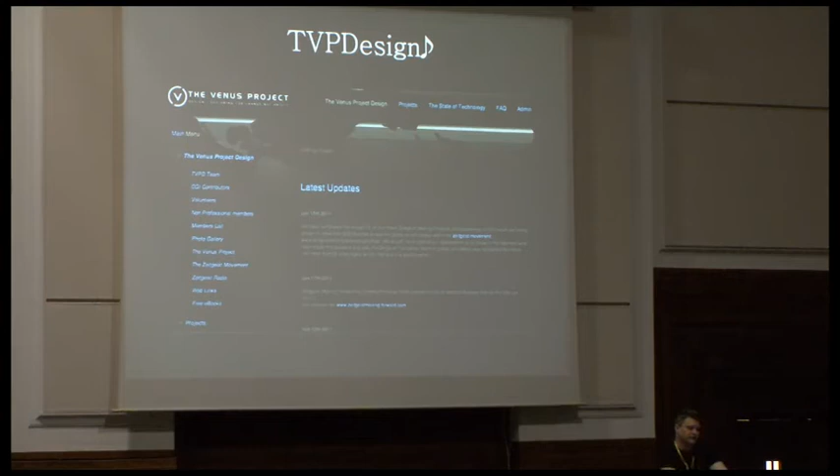So we later developed the website to include a global scientific and technical database. We've now got around 1,500 people on that database, from architects, engineers, neuroscientists, all the different scientific fields. We've got technicians from all different fields signed up there, so that if at some point in the future a country does decide to take on the Venus Project ideals and build the first city, we can pull on that database and bring people from that local area or country into the design of those first cities.

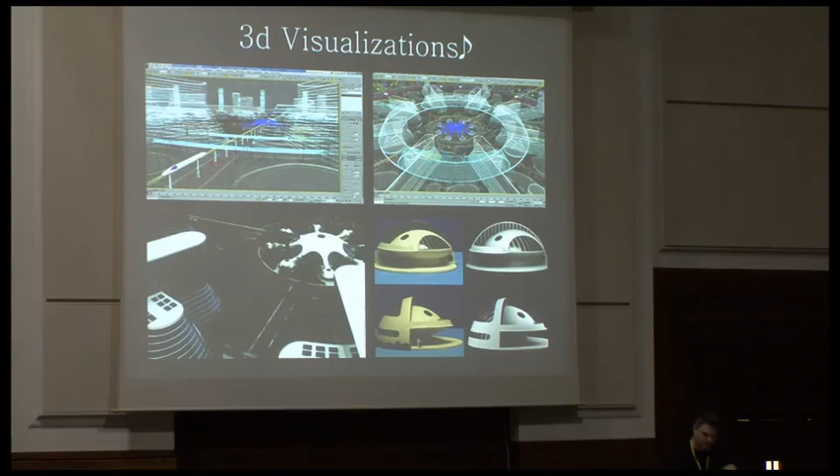Myself and my partner have also had a long-term interest in 3D computer-aided visualizations. This is some of the stuff in mid-process that we've been working on with the Venus Project. We also have a group of volunteers through the database that help us with the 3D modelling. So we're taking Jacques' thousands of sketches and creating 3D models out of those for visualisation purposes to show people what these cities may look like in the future.

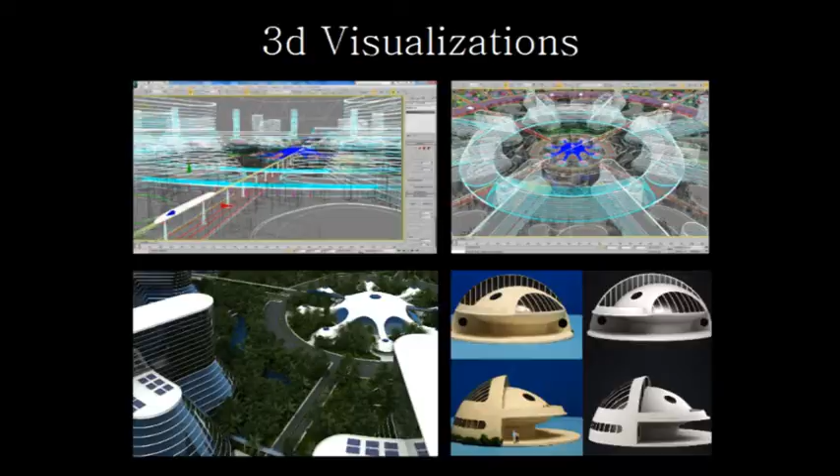Having spent much time with Jacques over the last few years developing his sketches into 3D models and learning about the design principles he uses and why, I'd like to share with you today a broader understanding of why the cities look the way they do, why they're circular, why the buildings are white. Many of these questions are normally addressed - especially on Facebook, people grilling me for hours about why things are the way they are. So we'll go into some of that now.

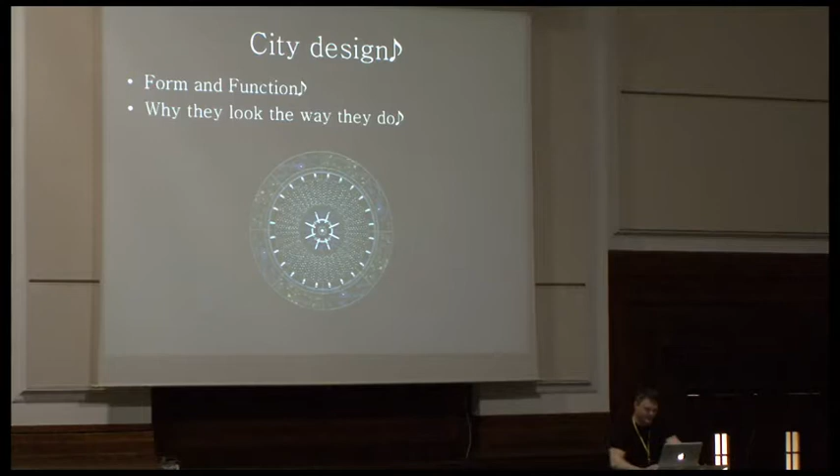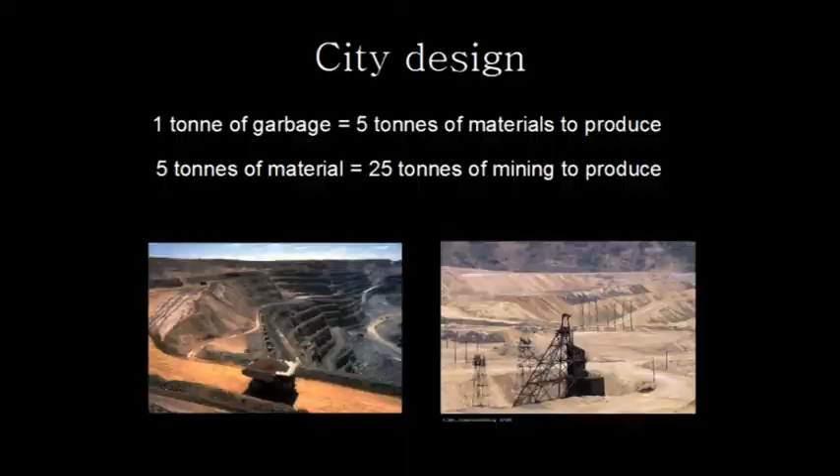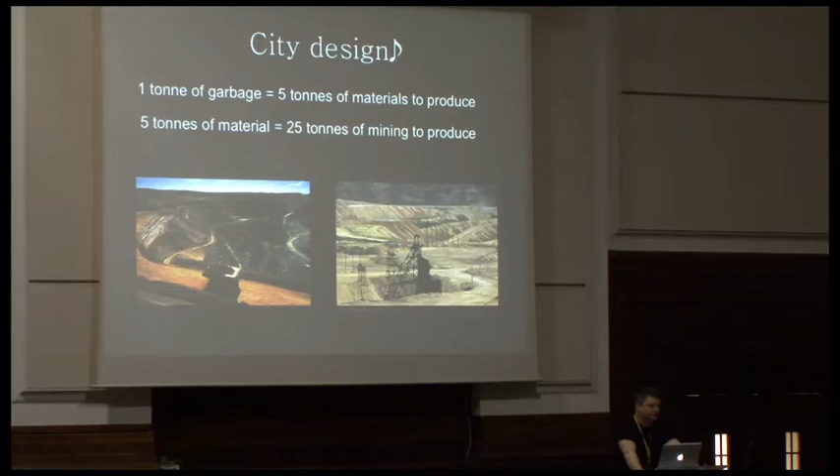Our current system of resource extraction, transportation through to finalised manufacturing and production of goods and their transportation to the end user, is extremely inefficient. It's wasteful and outdated. When you consider 99% of all materials produced in the US ends up in a landfill within 6 weeks, and every tonne of garbage dumped takes 5 tonnes of material resources to produce, the waste in our current system is clearly out of control. When you add the cost of importing and exporting these goods all over the globe and the inherent pollution caused within this system, it's clear this is a complete failure on all levels. We can't continue to do this if we want to survive on this planet.

The Venus Project cities are not built for architectural ego, and hence need to be evaluated on a different set of criteria than we're used to - that of actual functionality. It's not something architects are taught in our current schools. Just as we try to identify the root causes of our social ills within the Venus Project, we also need to understand the root causes of why we have the problems in the cities we currently do, so we can understand the actual reasoning behind why Jacques designs the cities the way he does.

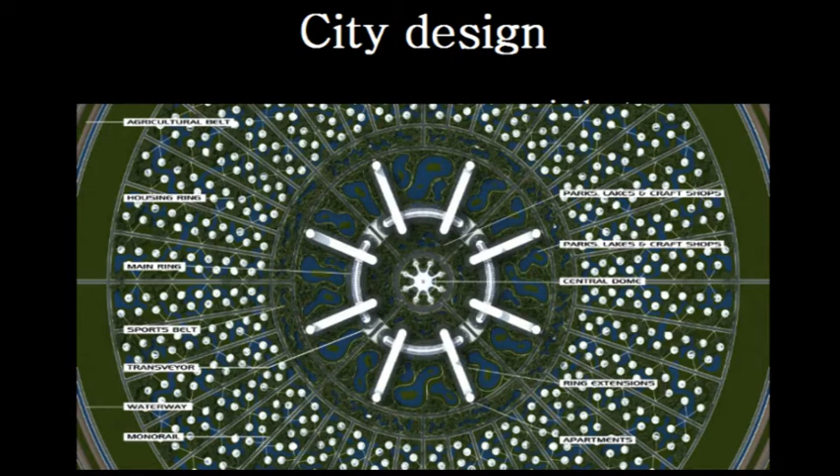The industrial areas are outside of the city, and where possible are self-contained resource extraction and distribution nodes, with on-site design, manufacturing and production facilities all rolled into one. Connected via maglev freight trains to the main city hubs for delivery of goods produced, while drastically reducing pollution in the city hubs, whilst utilising a monorail passenger transport system between local city hubs. The pollution is almost completely annihilated from what our current system is.

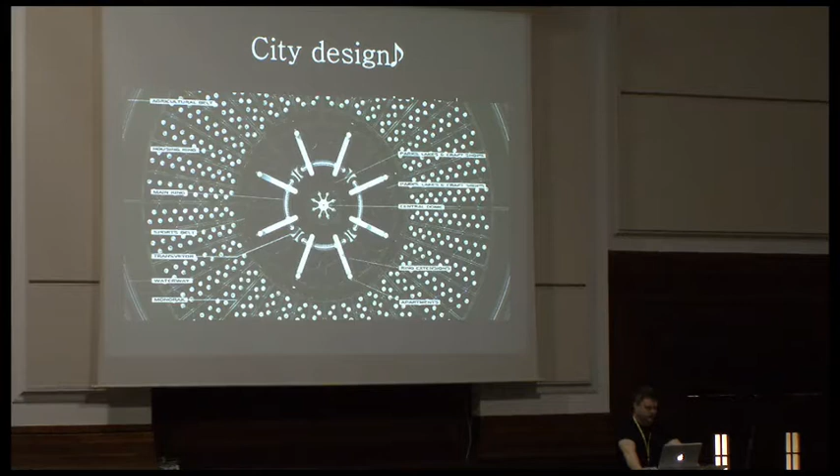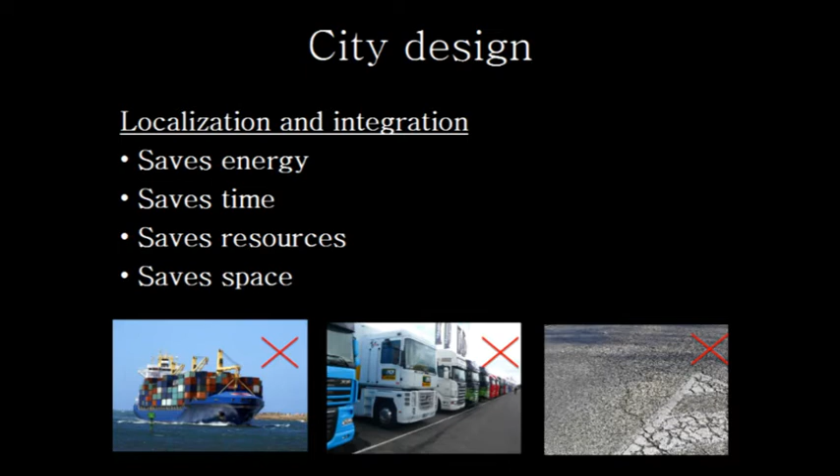By having the design and manufacturing facilities located together at the same site, combined with on-site resource storage facilities, a huge amount of energy and efficiency is saved. And when you add to this the fact that transportation of material resources and finished goods is handled by maglev trains, by clean, renewable energies, and the removal of unnecessary shipping and transportation of those resources from the source of extraction to the manufacturing plants, the effect of intercity traffic would be immense, not to mention the huge saving of both human and labour resources.

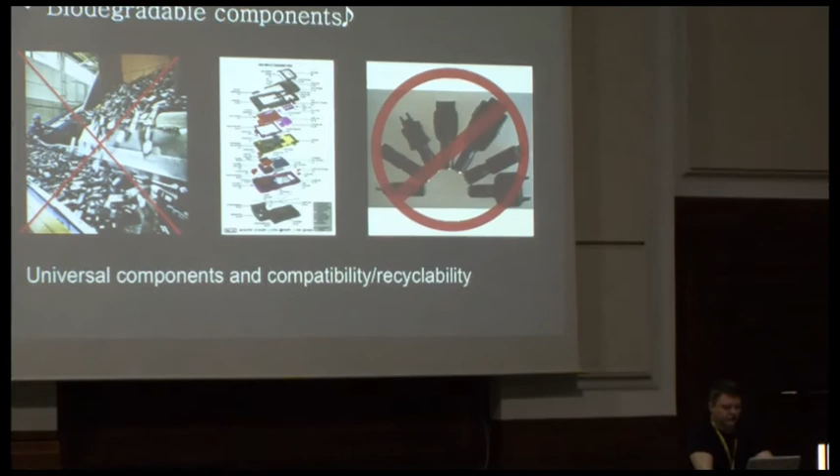Where possible, all goods produced would be biodegradable or recyclable. For example, in the case of electronic goods, these would be designed with each individual component being upgradable, utilising standardised parts and connectors, reducing the amount of waste as technology improves and products become outdated. When you consider the various options we have for creating natural plastics, such as palm oil or hemp oil, as well as genetically engineered plastics,

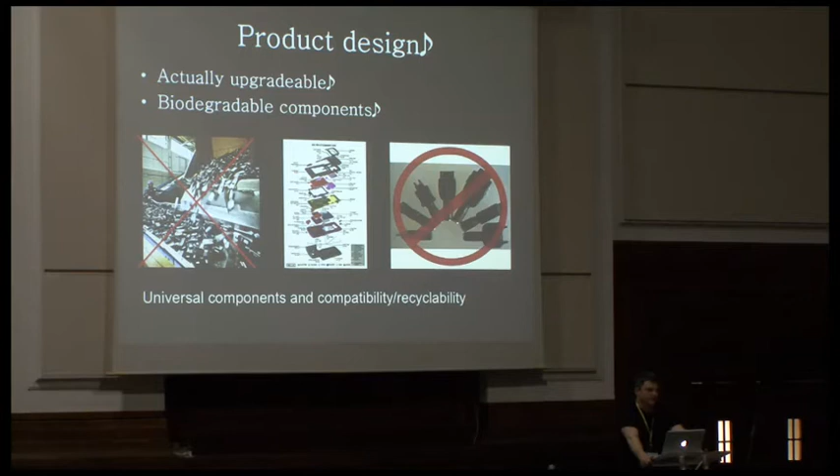our reliance on oil is almost completely wiped out. The only reason we still use oil now is for the profit incentive, because it's not profitable to invest into renewable energies at this time.

Many people initially see Jacques' work and think to themselves, it's just a fantasy, it's a big utopian dream, the buildings all look like something from Star Trek, it'll never happen. They don't look at the purpose behind the architecture. It's very difficult for us to present the architecture in the way that Jacques has designed it in one book or one video. It's important for us, if we are serious about conserving the resources of our planet, that we understand that function must become the dominant value over aesthetics, even though this is very difficult for many due to our current indoctrination into our materialistic and wasteful consumerist aesthetic culture.

The circular arrangement of the city needs less energy and materials in transportation of goods and services and people. Also, it's easier to make an inbuilt transportation system in a circular system. The routing of transportation is linear and radial, and therefore more efficient.

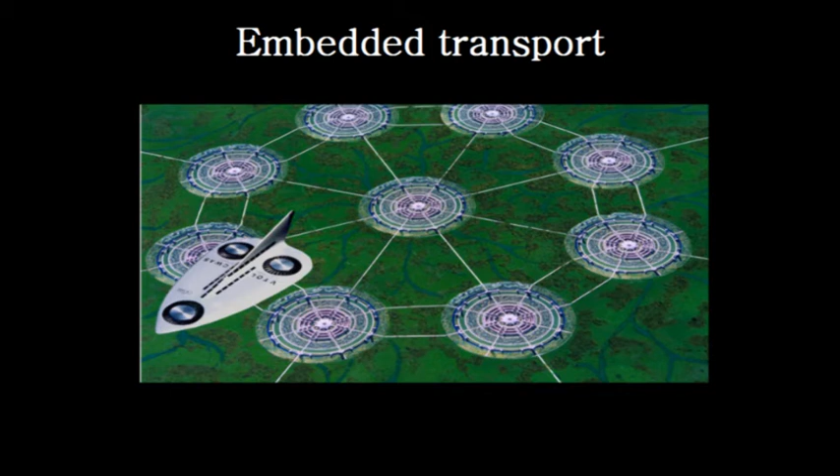You don't need traffic lights everywhere. You don't need roundabouts everywhere. Much of the transportation would be off the ground. The on-ground transportation would be for the emergency services to get to people if they have accidents or if someone's ill in their home, etc. The transportation between city hubs would be via maglev or monorail, depending on the distance.

With the city being designed in a circular arrangement, you only ever need to design one eighth of the city, and then we array it to become a circular city. This would save a huge amount of time on the actual design process of creating these cities.

The standardisation of buildings is a more efficient use of resources if we're serious about minimising waste and maximising efficiency. For example, if you look at some of the buildings in London, depending on the level of the building, you have different size windows. You might have 4 or 5 glazed windows in a row, then a single one, then a double, and in order to produce those, we have to have different designs for each of them. It takes a different amount of materials for each to be created. If we standardise those, it becomes a much more efficient process, cheaper on resources, and easier to make.

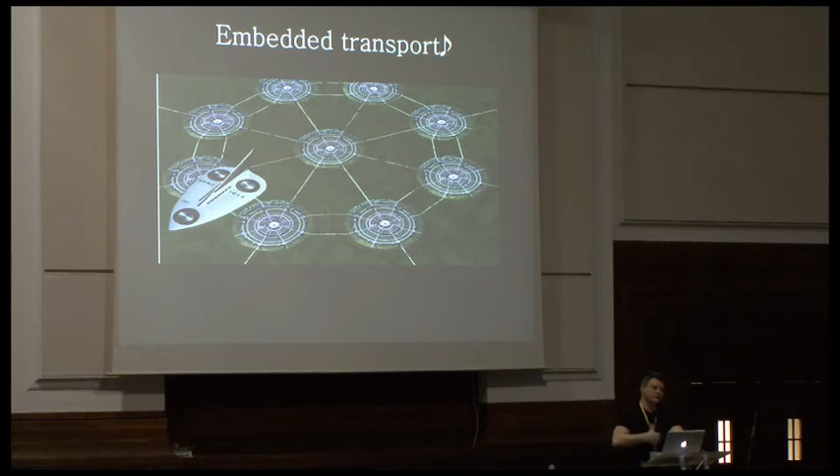We need to start thinking about the actual functionality of our cities and our buildings, taking this into account rather than just looking at how the building looks, whether it's aesthetically pleasing to my cultural values, which are different from your cultural values or yours.

Many of the structures are dome-shaped. The reason for this is that dome structures are structurally stronger than current home types and won't collapse in cases of earthquakes. These buildings have more surface area for direct sunlight. The reason they're white is because we would be using ceramic skin that would have embedded solar panel cells, so that the homes themselves are actually self-generating homes. They generate their own electricity.

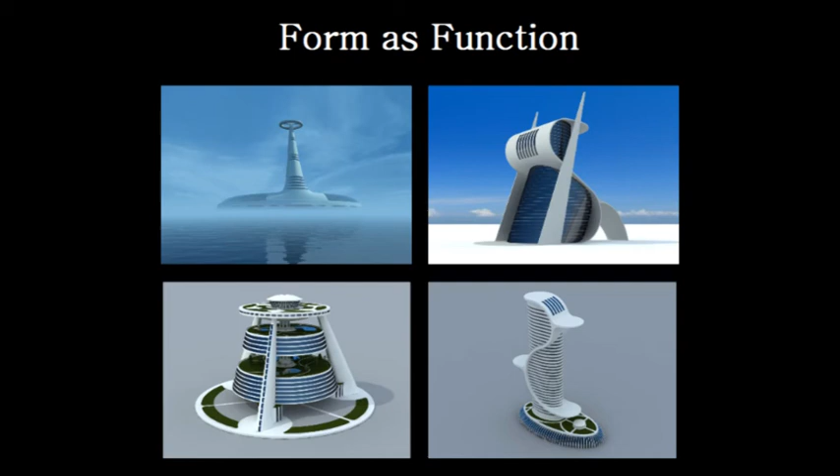Obviously, this would only be used in countries where there's direct sunlight for most of the day, but they would also be combined with other energy sources within the city, such as wind power or tidal power, depending on whereabouts the city was built.

Domes also take less maintenance than the typical cuboid homes that we're used to. Due to the increased surface area, homes like this can easily generate their own heating and cooling, and house power. In countries where there isn't enough sunlight to do this, we would obviously use different technologies, like ground source heat exchangers, etc.

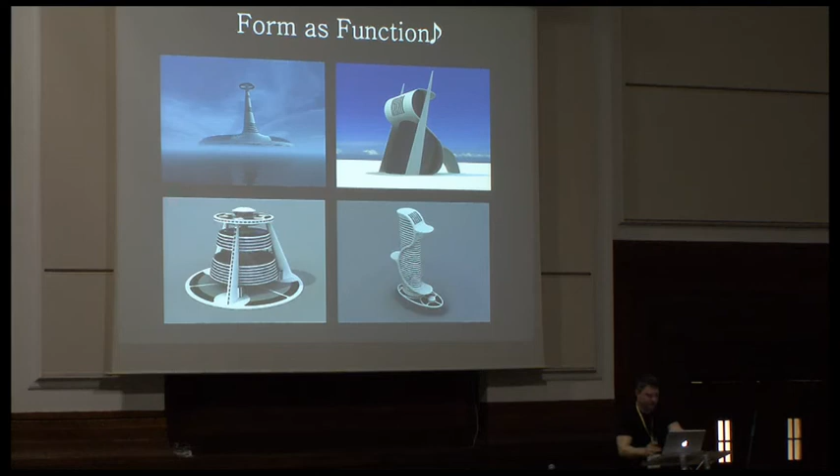Additionally, these structures are easily constructed using 3D printing technologies, as one continuously sealed mould with openings left for windows, although the latest in technology is suggesting that within probably the next 3 or 4 years we would actually be able to do 3D printing with multiple materials in the same mould. So you'd actually be building the house with the concrete and the windows all in one, all sprayed in the printer.

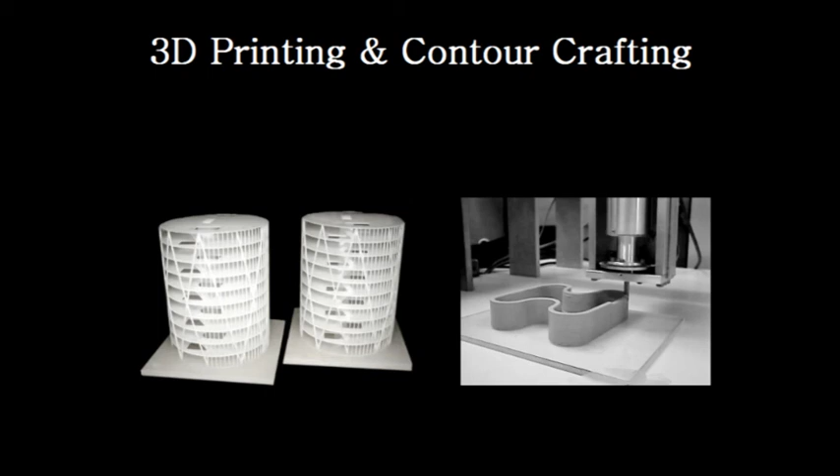The current printers that we've got are typically table-sized. There aren't any larger, apart from the one in California University, which they're now using to build complete brick walls with the services inside the actual walls.

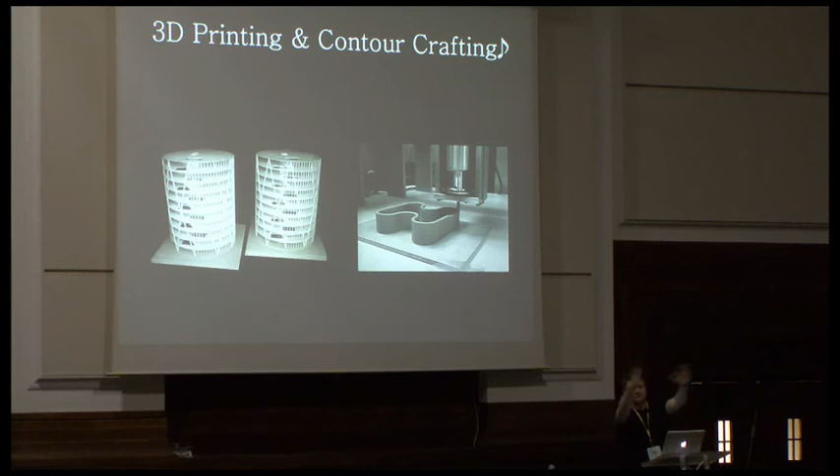There's no reason, apart from the monetary reason, why we can't make these machines absolutely huge. They could be the size of this room, for example, printing off houses, travelling down tracks, printing off complete housing areas for these cities in a number of days rather than several years as it would currently take with our current construction methods.

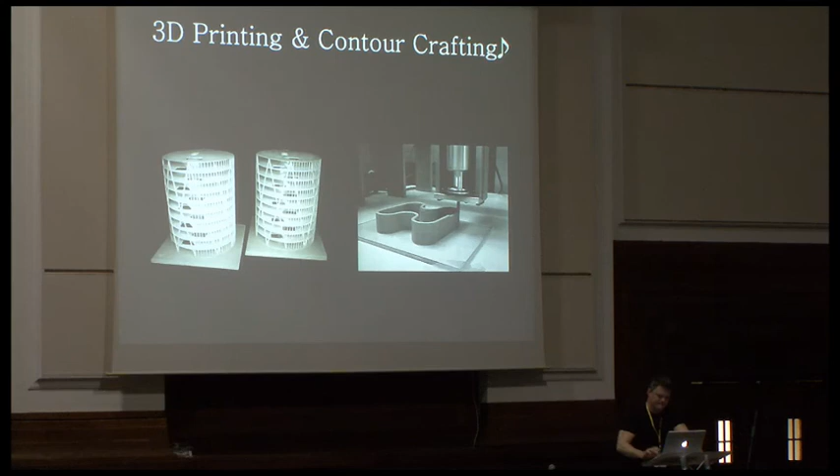Currently, we conceive of homes within the restrictions of our habits and our indoctrination into our culture and architectural design styles of that culture. We consider it normal to live in a square brick and wood-based house, which often breaks over the course of its life, requiring endless maintenance, and is often flattened in major storms, as we see year upon year, especially in this country.